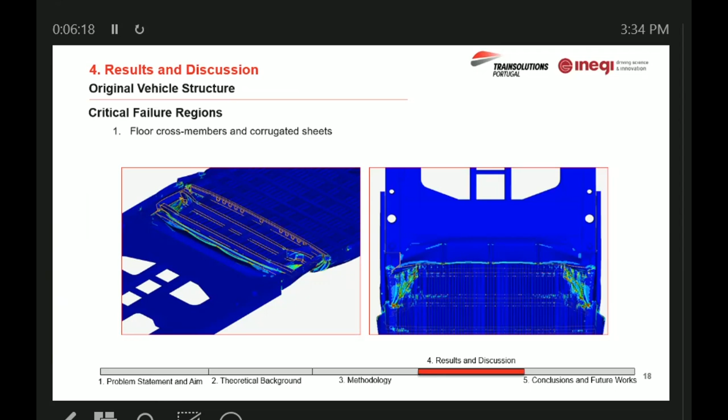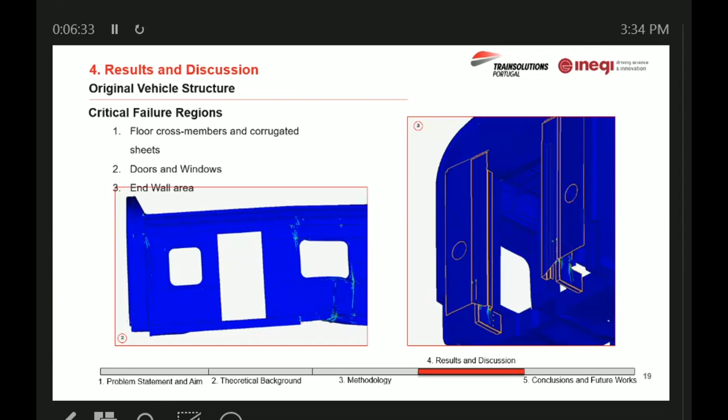The company that is supposed to manufacture this made a bigger transition region to try and mitigate that effect between the chassis and the floor, which is very rigid, and then it goes to the floor of the train, which is much more flexible. We had those issues that we simulated, or that we found through simulation.

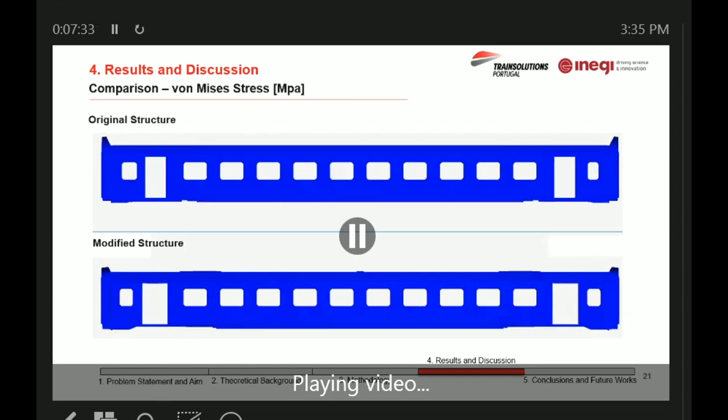Here we have a comparison of the first video and then the modified structure. We can already see a different dynamic behavior. Let me show the modified structure again.

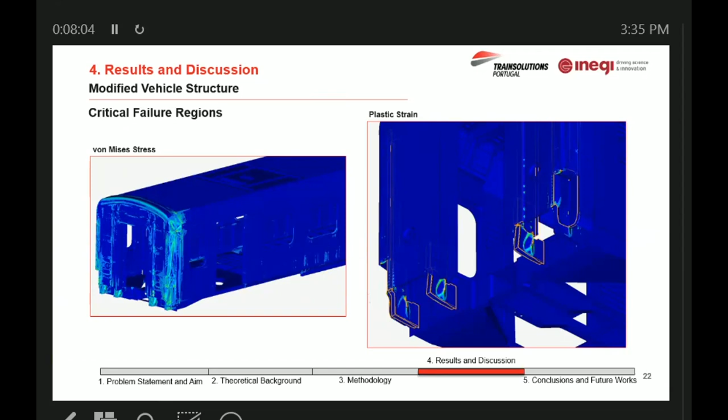The modified structure pretty much concentrates—I can show it here. It would still lead to some failure, but instead of having critical regions around the doors and windows and passenger area, it would be more concentrated in the end wall area, which is a place more suitable to collapse and fail safely without injuring passengers.

So we decided to go a step further and also try to compare these models in terms of the European regulation. There are a bunch of design requirements, so we only compared these requirements in terms of survival space and deceleration levels.

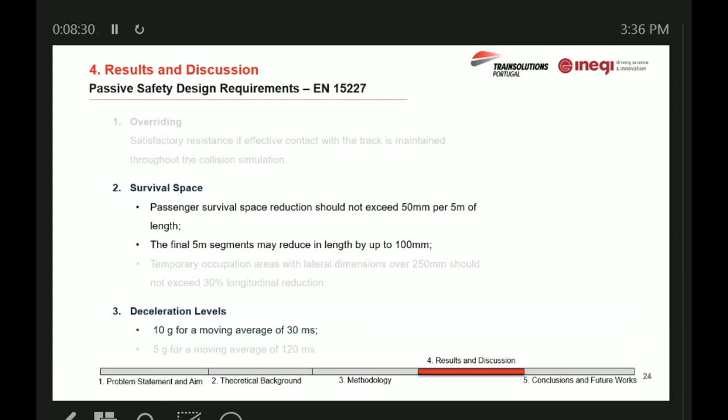Starting with the survival space: the regulation states a criteria that in the area at the beginning of the passenger survival space, counting 5 meters, the reduction in length after the crash shall not exceed 50 millimeters, which is quite a difficult criteria.

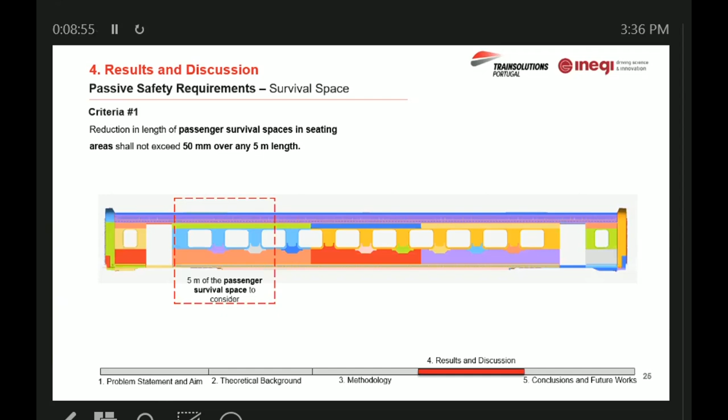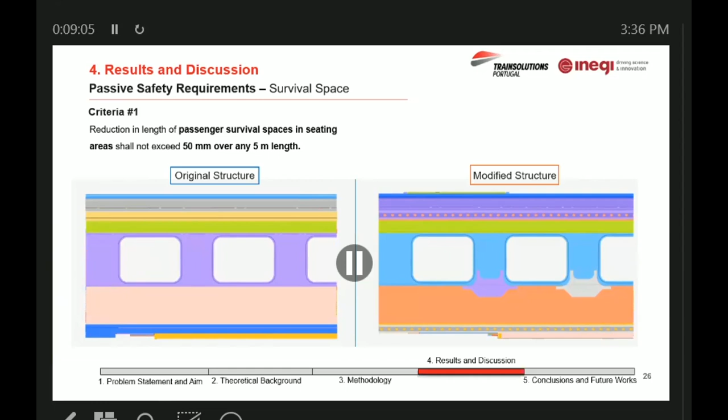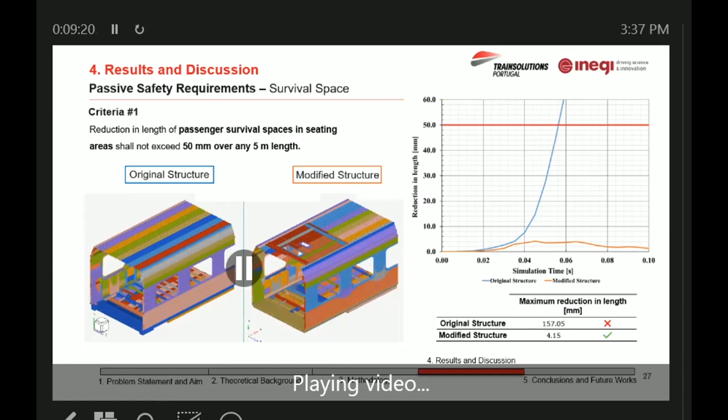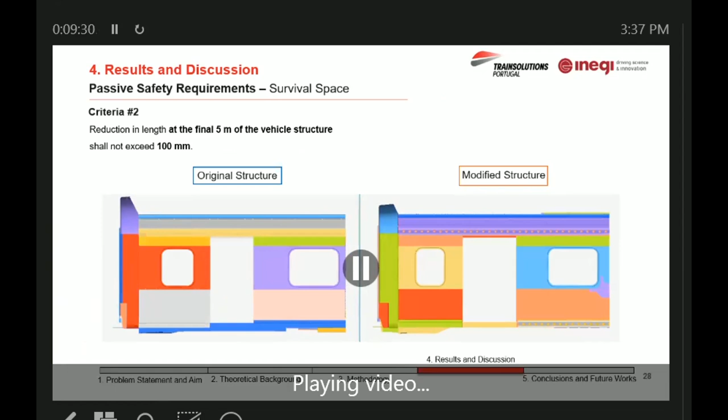When we compare a second criteria, the reduction in length in the final 5 meters of the vehicle, we also have some videos. This was the hardest criteria, so to say, because even though the modified structure was able to be below the limit of the regulation, at 90 millimeters, it was still close—below, but without a big safety margin.

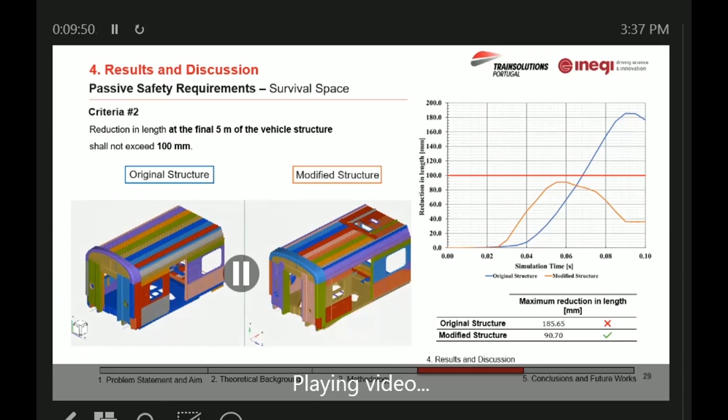Finally, an interesting result: we analyzed the deceleration limits, which, as I showed before, states that doing a moving average from 30 milliseconds, the acceleration levels in the structure should not surpass 10 G. Here's an interesting result, because both structures would fail this criteria, and even the modified structure that performed very well in terms of survival space yielded an even higher acceleration level.

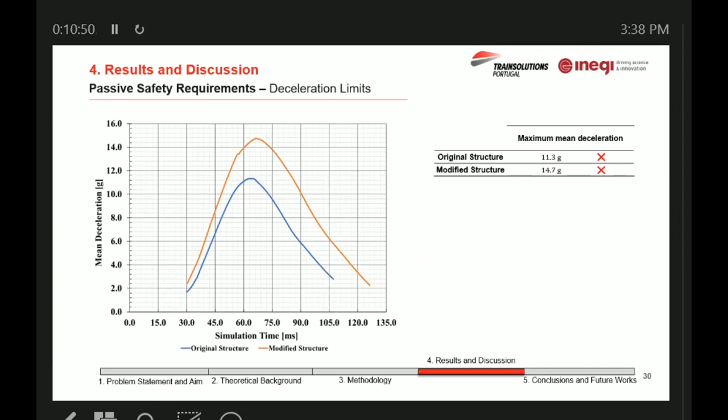After all the videos we saw, we can assure that we were able to modify the structure, but it's a bit rigid. It's important to have a balance—it should not deform too brutally, but it should also deform enough to dissipate energy and not transmit these higher levels to eventual passengers.

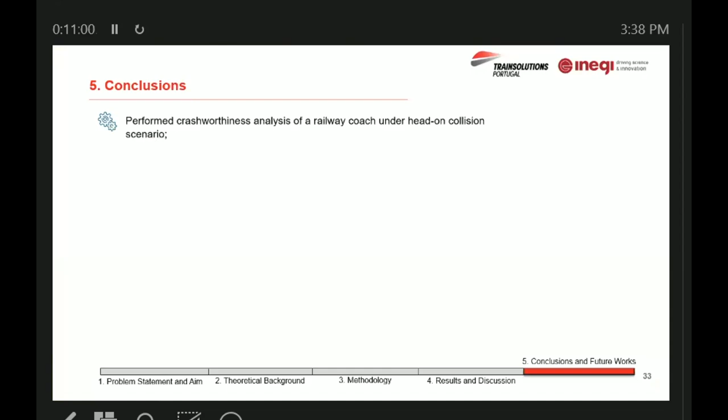So basically that's among the conclusions of our work. We were able to perform this kind of crashworthiness analysis under a head-on collision scenario. We identified critical failure regions and also studied a modified structure in terms of those regions. We found that the modified structure was able to improve the survival space criteria, but it yielded higher acceleration levels because it is now more rigid.

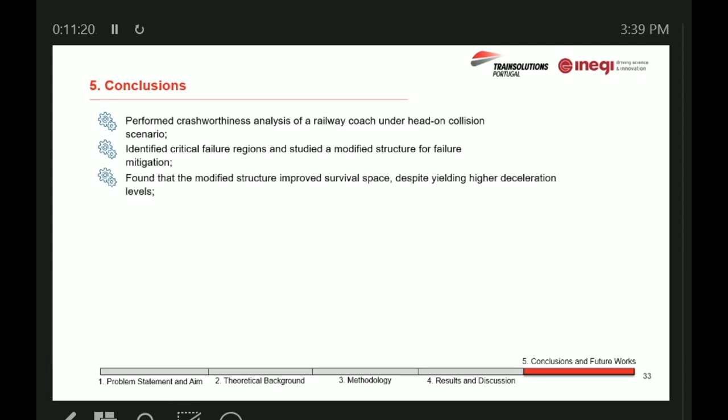Overall, our research helped confirm that these kinds of simulations are very important for the railway vehicle, also because of the higher cost of performing crash tests, and the regulations basically point us in that direction.

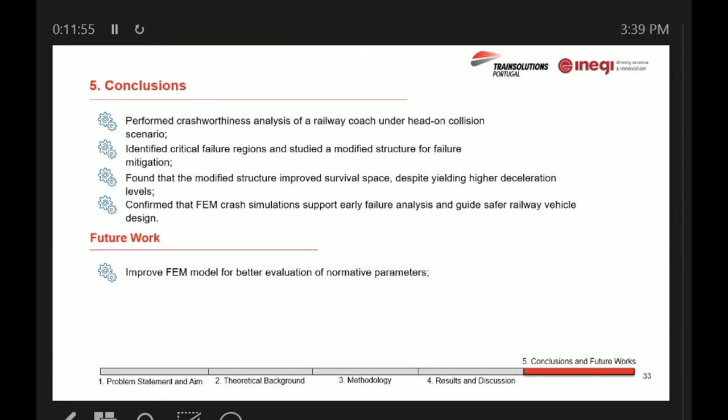In terms of future work, we still have a lot to do. We need to improve our model because there are a bunch of parameters we didn't analyze, and also the way we're doing it may not be the best way to analyze it—so we still need to improve that.

Also, we did this analysis for a simplified case. We still need to do it for the actual collision scenarios that are in the regulation, and this is very important.

We are trying to explore simplification techniques because this model is huge—it takes time to simulate. We are looking at strategies such as super element techniques and multi-domain techniques to try and shorten that time without compromising accuracy, to give an answer to our industrial partners, which is of course very important. And also, validation of our model.

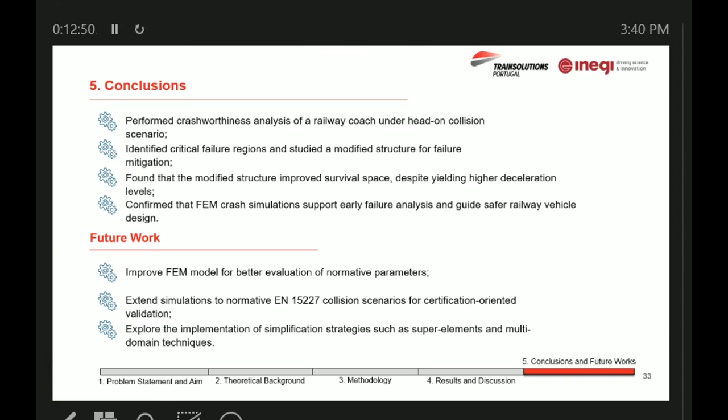Next year we will be starting the testing campaign for static, not crash analysis, but it will be very important for us to validate our model through those static scenarios as well. And that's it—thank you very much for your attention.